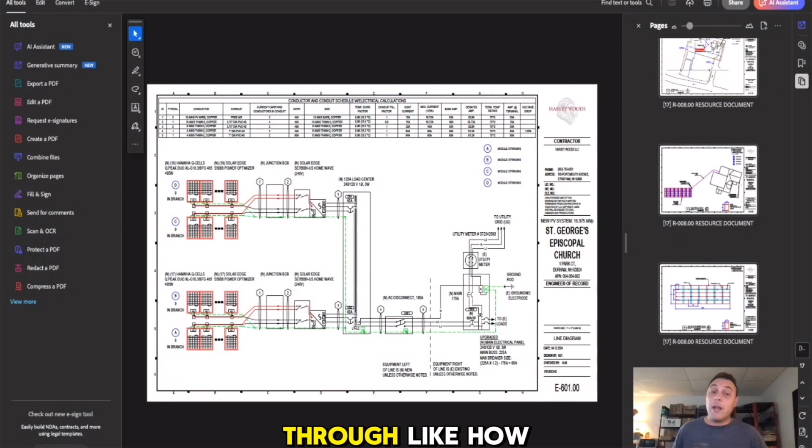So we are going to dive into this thing right here. And I'm gonna walk you guys through how to at least read this so you can get an idea on how much wire we need, what kind of equipment, things like that. Now this is a ground mount for a church that we just built up.

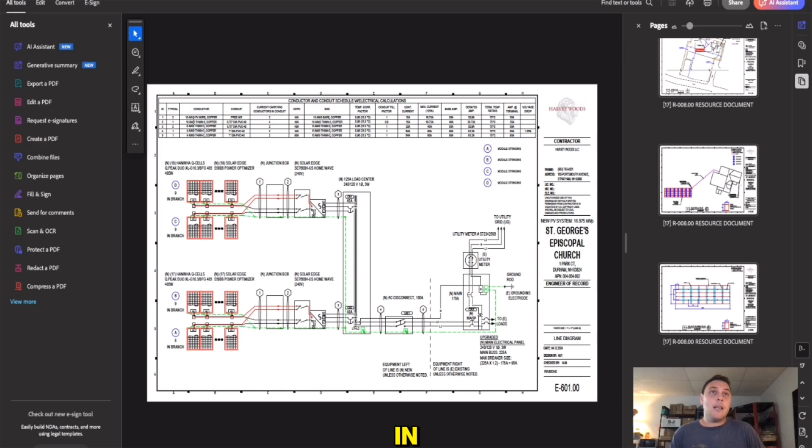And so what we see right here, these are our solar panels, right? And we have 1, 2, 3, 4 branches or 4 strings in our solar panels that are going to our power optimizers. Our power optimizers are right back there. So the first thing that we want to look at is we want to zoom in. So let me just zoom in here. See this diagram right here?

So here's our conductors. Our conductors are our wires. And then here's our equipment ground conductors. These are the 2 types of wire that you're going to need for a PV system, right? So in our diagram, here we have our power optimizers, and boom, they run into number 1. Number 1 corresponds to number 1 right here, which is 10 AWG PV wire and copper.

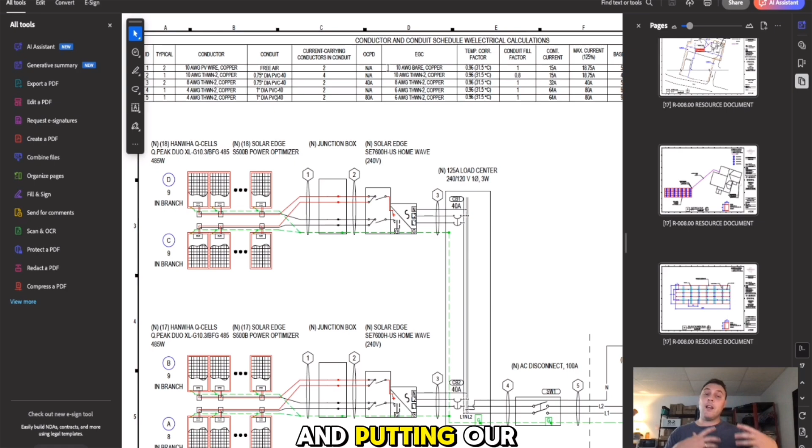And then for our ground, because our ground is kind of separate from our PV wire, we need number 10 as well. So coming from our power optimizers, when we're making our whips via MC4 connection or what have you, we're going to be using number 10 wire. So when we're doing our calculations and putting our quotes together and getting everything ready for purchasing from our distributors, we want to make sure that we have the correct measurements for our red and our black and our copper with the correct gauge of the wire.

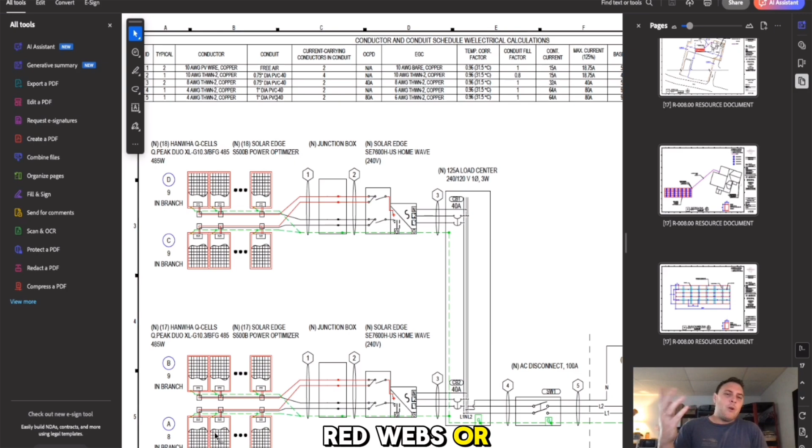Fantastic. So let's just say it's 100 feet of red black for each one of these. So 1, 2, 3, 4, let's say for our red whips or whatever, we're going to need like 200 feet of red, 200 feet of black, depending on what our whips are. So that's where you want to look into your wiring diagrams, and you want to optimize your strings to make sure that you're not spending too much money on wire.

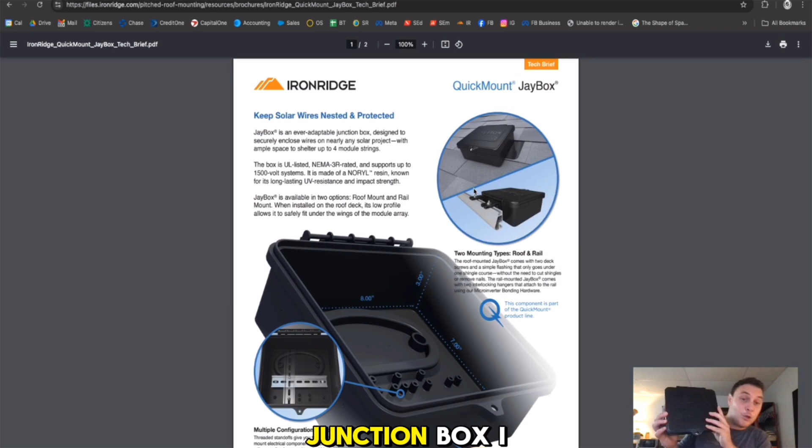So once we get there, we hit what's called a junction box. And a junction box is one of these things. This is made by IronRidge. This is a junction box. I have one right here. I believe the Solar Goat has some videos of him attacking a junction box. They're very sturdy, waterproof, durable. They do everything that you need.

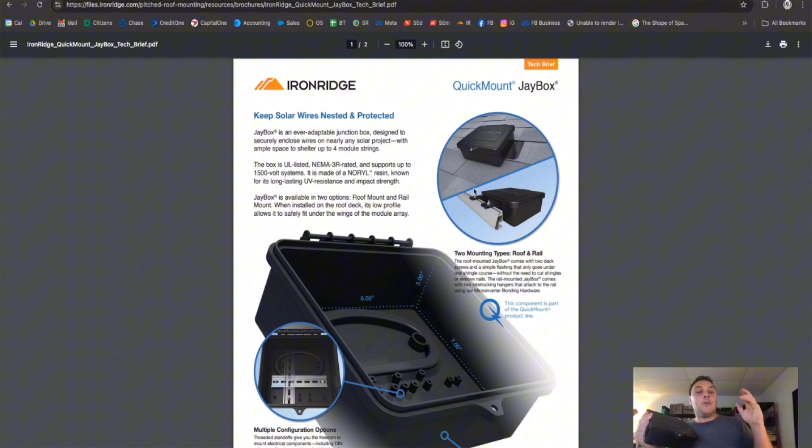But a junction box is a place where we can take all of that number 10 wire, combine that together, and run a larger gauge wire to our inverter, right here. So we're not running as many wires. So our junction box is right there. And what we can see here is from our junction box.

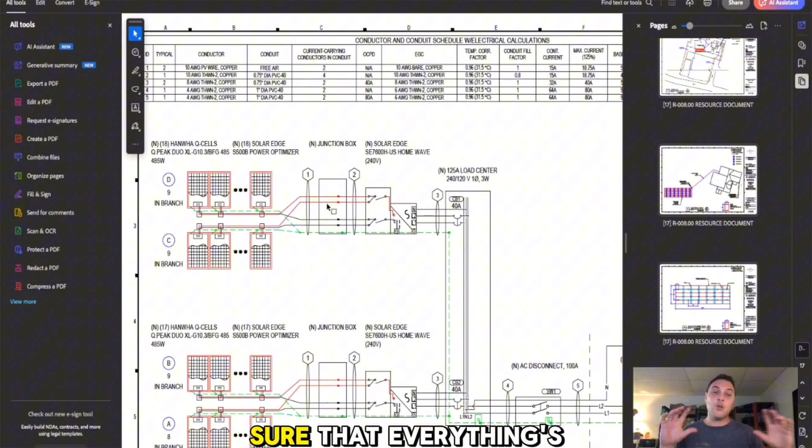So with each junction box, make sure that you have strain relief connectors. So when the wires go into the junction box and you try to pull them, we don't damage the connections on the inside of the junction box. And we're making sure that everything's nice and tight and to code, right? Because we got to be to code. If we're not to code, we fail inspection, and then guys don't get paid, but they're still like, show me the money, right?

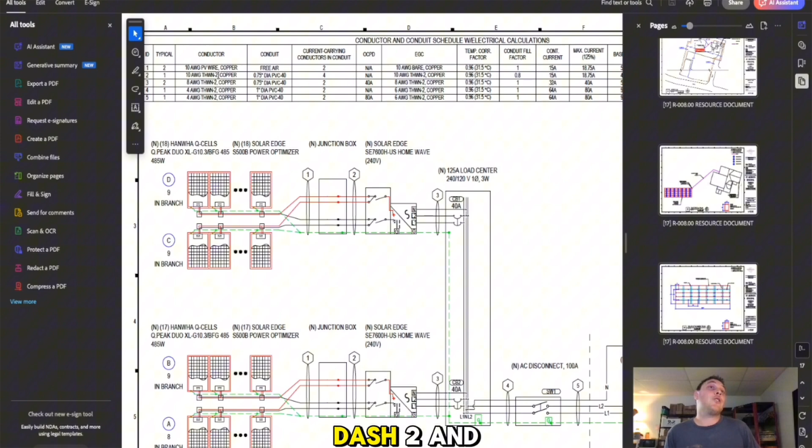So from that junction box, we can look at number 2 to identify the wires that need to come out of our junction box. So here for number 2, we have number 10 AWG THWN-2 and our copper wire. So we have number 10 and our copper wire coming from our junction box.

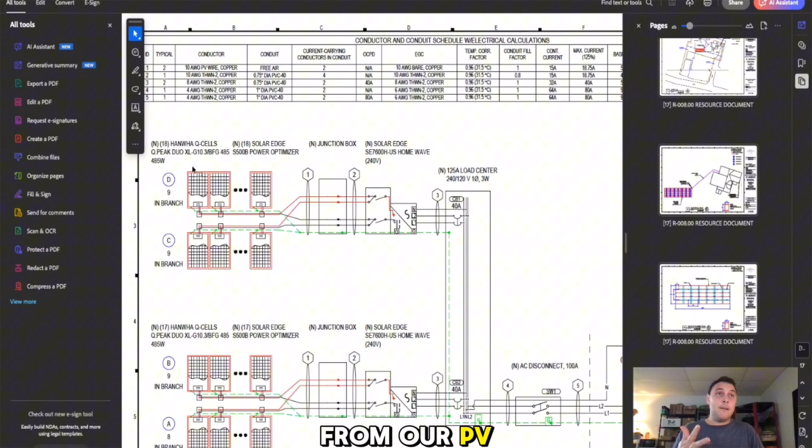And from that junction box, we are landing into, in this case, a SolarEdge 7600 inverter, and we have 2 of them. So our L1, L2, and our neutral, right? So over on the PV side, we had red, black, and ground running from our PV. And then red, black, and our ground go into our junction box. Our ground is maintaining ground consistency throughout the system, right? From our junction box, we're landing into our L1, L2, and then we also have our neutral.

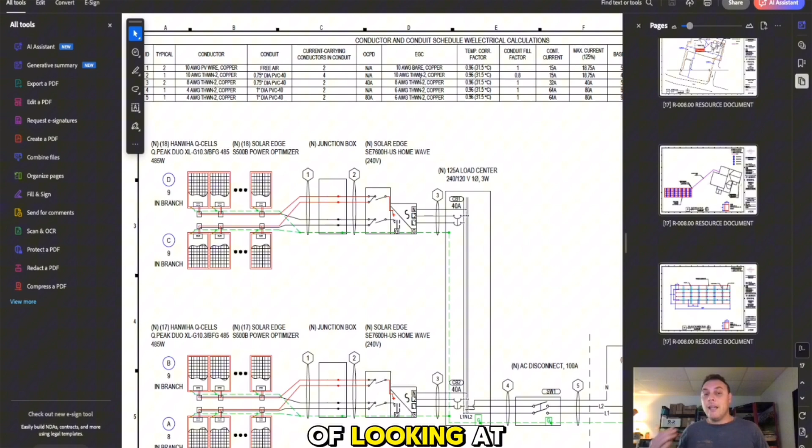And then from there, what are the wires that we need in number 3? So we go up to number 3 up here, and we shift down to number 8 wire gauge, right? Number 8 wire gauge here, and number 8 over here for our copper. So what we can see here is we're changing our wire gauge. So in terms of looking at our schematic and knowing what kind of purchasing we need, be aware that we only need X amount of number 10 wire for this section right here.

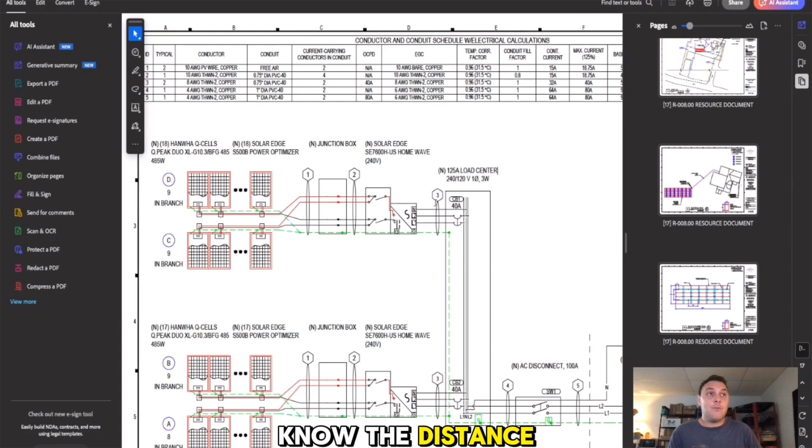But once we leave the inverter, whatever distance this inverter needs to go to our load center, which is this right here. Here's our load center, about 55 bucks. Now this has 12 spaces. You can do ones with smaller spaces and things like that. But going to our load center, we need to know the distance that we're gonna travel from our inverters to this load center. And on this load center, we're gonna have a 40 amp breaker for each.

Which is fantastic. And so number 3, if we go to number 3, we're running number 8 from our inverter over to our load center. Fantastic, great. Now we know how much. Now normally the load center is really not that far from the inverter. So we're talking typically less than 25 feet for a red, black, neutral, and our ground.

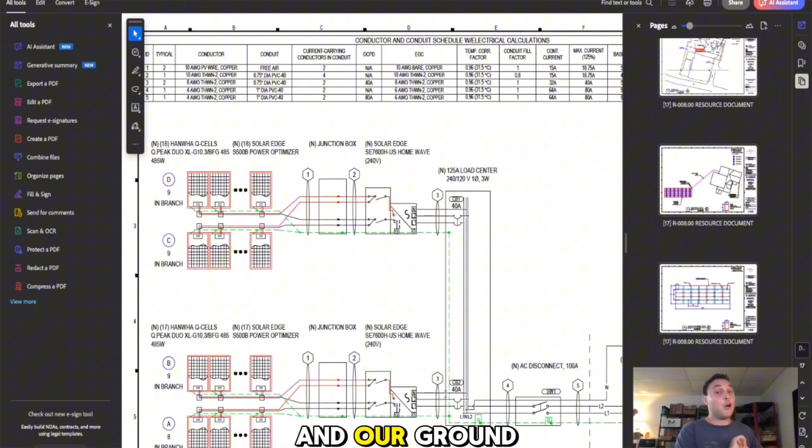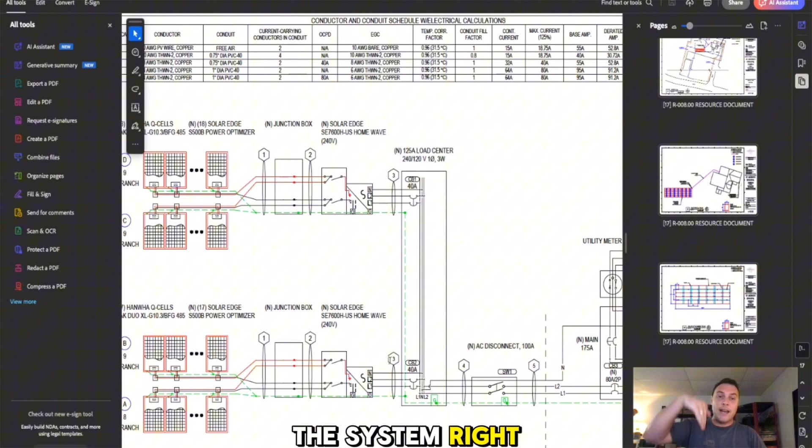Once we land into our load center, in this case, this is a ground mount. So in our ground mount, we like to hang our inverters onto the ground mount array, so our disconnects are located right there. And then it goes into Schedule 40 trenching or Schedule 80. So if you're going under a driveway, Schedule 80. Any loads coming down on top of the system that are not just people walking around, that's gonna be Schedule 80. If it's just a field, people are walking over it, there's no heavy equipment, no roads, no asphalt, no pavement, none of that stuff, Schedule 40.

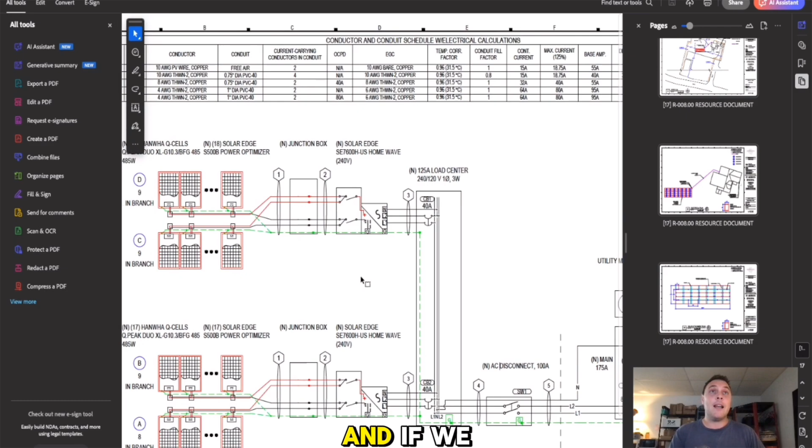It's really all you need to know if you're running in the residential sector. If we start getting into commercial, completely different conversation. But this is just for the residential guys for right now to get you started. So from this load center, this is where a trench happens at number 4. And if we go up to the 4 section, we see that we switch over to number 4 AWG and number 6 in terms of our copper run.

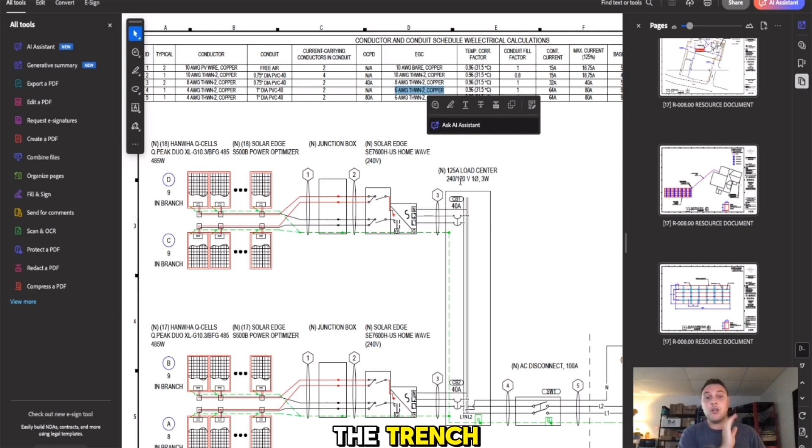So in this case, we have about 125 feet of trenching from the ground array that is connected. So we have our 125 load center. So this is sitting on the array, and then it goes down into the trench and over to where our master service panel, in this case the rectory, is located. And we run that down using our number 4 AWG and number 6 copper ground.

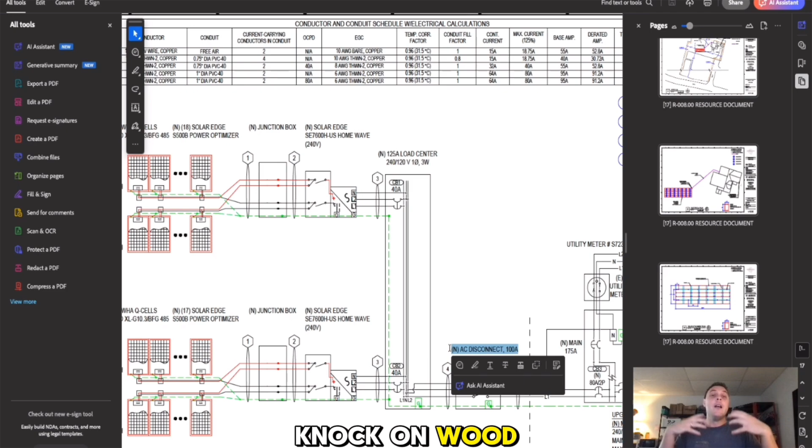And that is going to go to our 100 amp AC disconnect, which is going to be located outside so our fire department, if a catastrophic event happens, knock on wood, we put our AC disconnect outside so the fire crew can run up, boom, AC disconnect, the entire thing shut off.

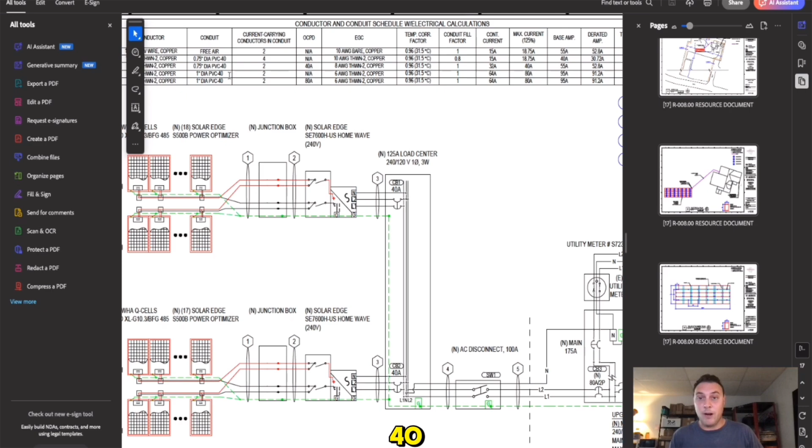So we're gonna have to be really key with how much Schedule 40. In this case we don't have tractors and roads and things like that going above this, so we're using Schedule 40. And in our plans, they're even nice enough to tell us the diameter of the PVC 40 that we're gonna need right here. So this is 1 inch PVC, Schedule 40, that we're gonna need.

And then number 6 grounding conductor and number 4 wires, red, black, neutral, that are going to be running from our load center into the trench. This is number 4 to our 100 amp AC disconnect. And that 100 amp AC disconnect looks like this bad boy right here. Probably one of the more expensive materials.

So when you're purchasing on an average residential, let's talk anywhere between 10 to 20 kW. So let's say 5, 10, 20 kW in terms of our system size. Average residential, if you budget around $750 to $1,250 per job in terms of AC materials, you should be good. Depending on market conditions and things like that, but you should be good.

So if you're shooting from the hip and you want to close a deal, you want to give somebody a great offer, but make sure that we're not skimping on materials. Never skimp on materials. $750, $1,250, something around there. That's what all of this stuff is going to cost when it's all said and done. This is one of the more expensive items, $274 MSRP.

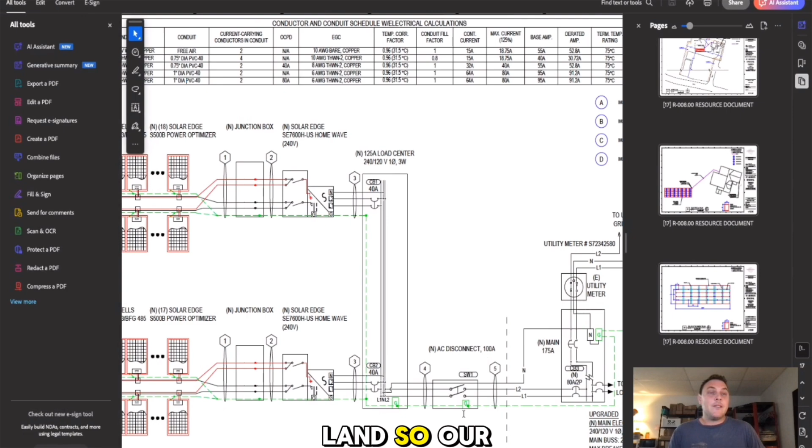And so all of these wires are going to land. So our red, black, neutral, and ground are going to land into our 100 amp AC disconnect. When we're purchasing, we want to make sure that we have the appropriate fuses for the disconnect that we're using. Very key. And then from there, we have another wire run, which is going to go to our main service

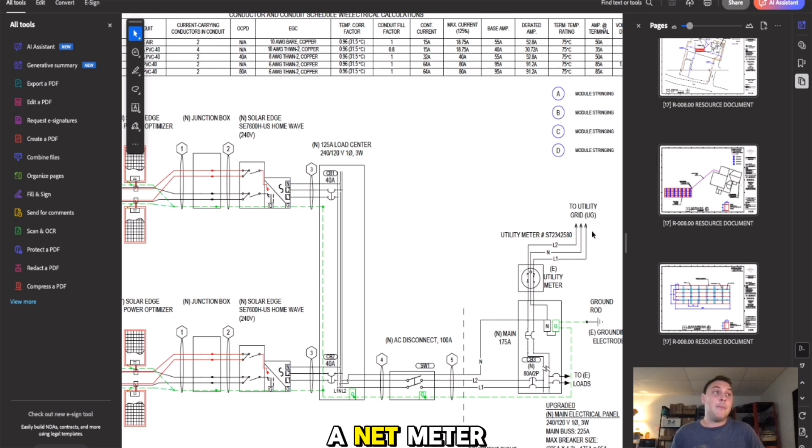panel. This is going to, in our case, be a line side tap running over into the utility meter, which will become a net meter, and out to the grid. L1, L2, neutral from everything, line side tap on everything. And for this wire run right here, we are going to go and refer to

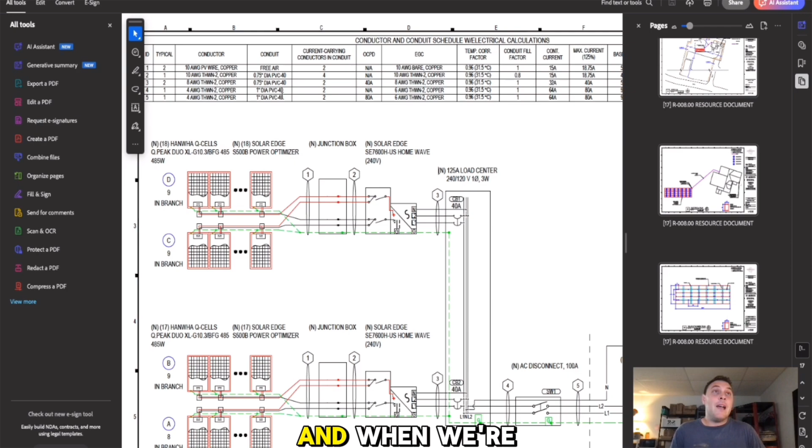number 5. Oh, let's go back there. Number 5, which maintains our number 4 for all of our conducting wires. That's our L1, L2, and number 6 for our grounding conductors that are going through there. And when we're talking about the different kinds of things, here it says 1-inch diameter PVC, but this is AC energy running inside at this point, getting to the master service panel. So you have a couple extra options.

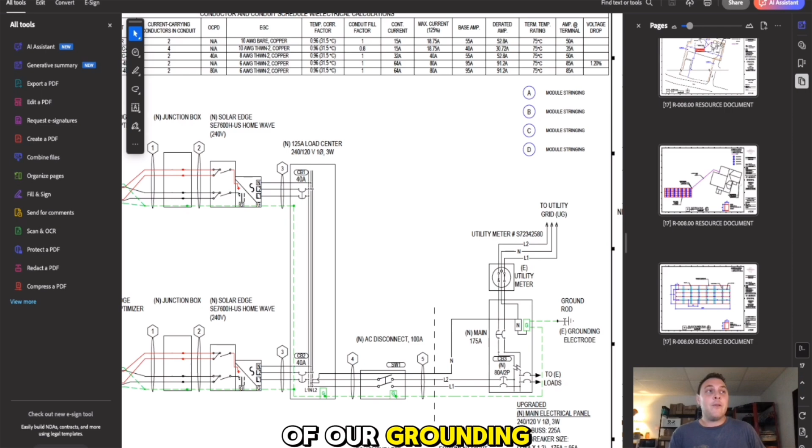This is where Enphase is really great, but SolarEdge, in terms of total power production, we wanted this thing to just pump as much power as possible. So we went with the SolarEdge system. And in terms of our grounding rod and things like that, your master electrician is going to take care of those things. You can look up how much a grounding rod is, but I just wanted to kind of show you, here are the main things, right?

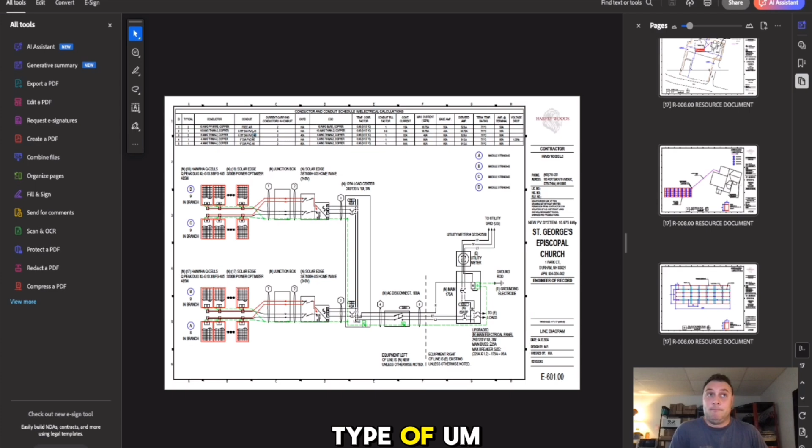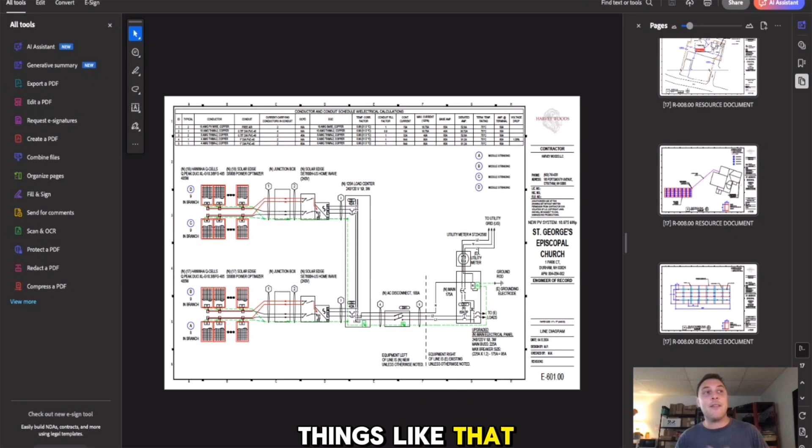When we're looking at an electrical schematic like this, we want to identify what are our branches, what kind of wire do we need. For each of these, we're going to need the connections based on the different type of conduits that we're going to use. In this case, largely we're going to use liquid tight, EMT, schedule 40, schedule 80 if we're trenching, things like that. And so we want the appropriate connectors, strain relief connectors, things for the master service panel so our wires don't scrape off their protective covering.

But I just wanted to put this out there because I don't see anybody talk about this stuff. If you want me to dive a little bit deeper into where these numbers come from, on how to dive into cut sheets. So let's say that I'm using a SolarEdge 7600 or I'm using an Enphase IQ8 type system. What should I use? What kind of connectors? What kind of wires do I need? If you want more content like this that you can benefit from, I just kind of wanted to show you.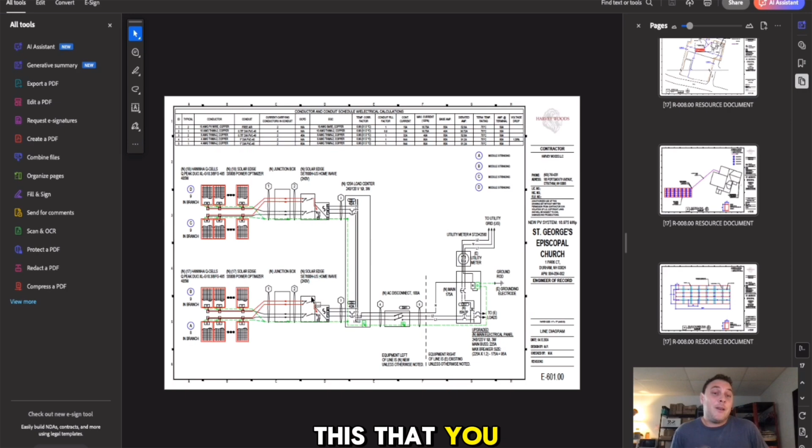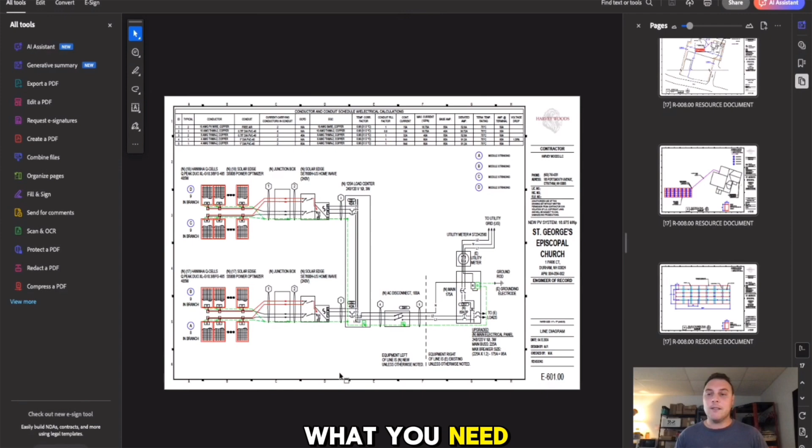Like here's the schedule 40 that you would use. Here's how you kind of estimate things out. You look at what your costs are. You're able to read your diagrams and know exactly what you need. So when your guys show up to a job site, remember, show me the money. Doesn't matter if the materials aren't there. These guys are still on site. They're still getting paid. So in terms of running a solar company, your purchasing department needs to be very, very clear and very accurate on the types of materials that you are going to need.

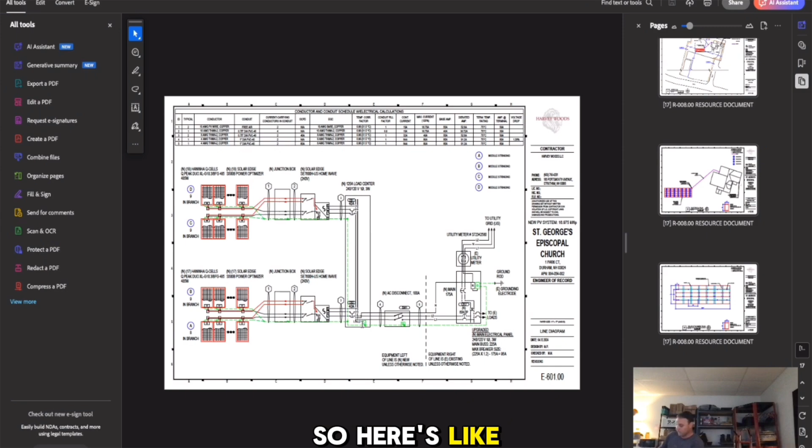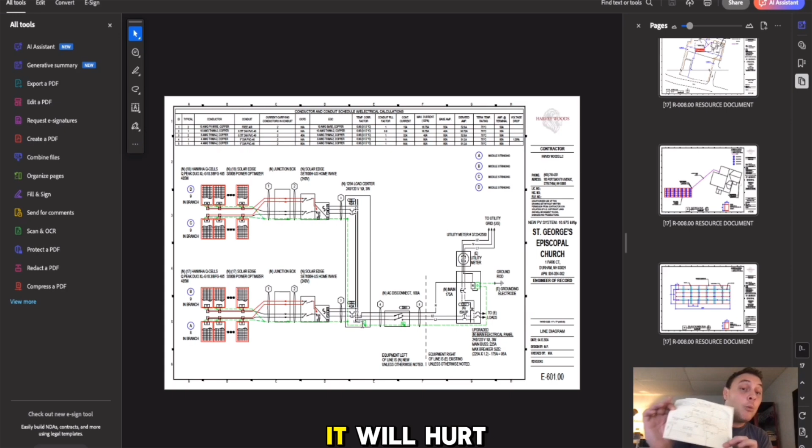And we're able to have a very, very accurate bill of materials that we're able to put together. But it starts with the salesperson. If the salesperson is no bueno, it will hurt you financially. So investing in making sure that you have full stack solar engineers is totally something that you want. I just wanted to put this video together, show everybody how to look at an electrical diagram for purchasing, how to understand the different components that you're going to need, and a couple insights that we've learned along the way, and we wanted to just help out.